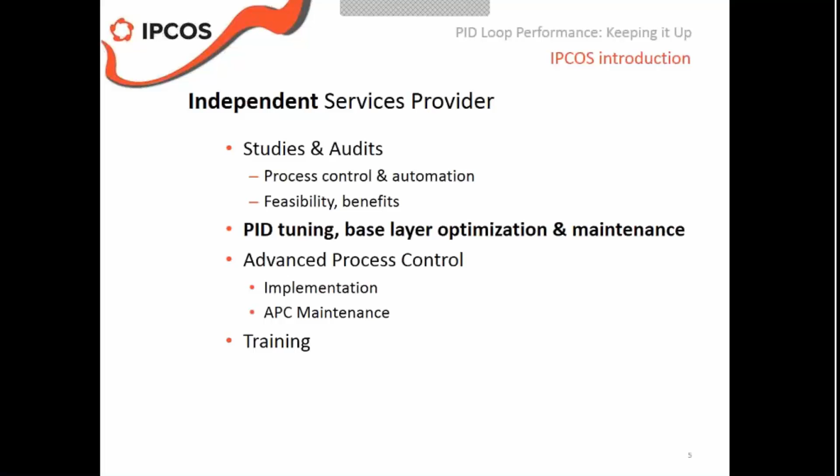All right, enough as an introduction to IPCOS. Let's get into the topic of the webinar now, PID loop performance, how to get it up to high levels, and how to keep it there.

Now let's start by recapturing why plants use PID control. Of course, the two main reasons are to provide basic stability to the process and to decouple the process. Let's take a minute to think about what this means.

Basic stability means doing automatic corrections in case of changes in the plant. This could be rejecting disturbances, like if it suddenly starts to rain, then you'll see variations in the overhead condenser of a column, and this would impact the temperature profile in the column. A PID loop could help correct that automatically.

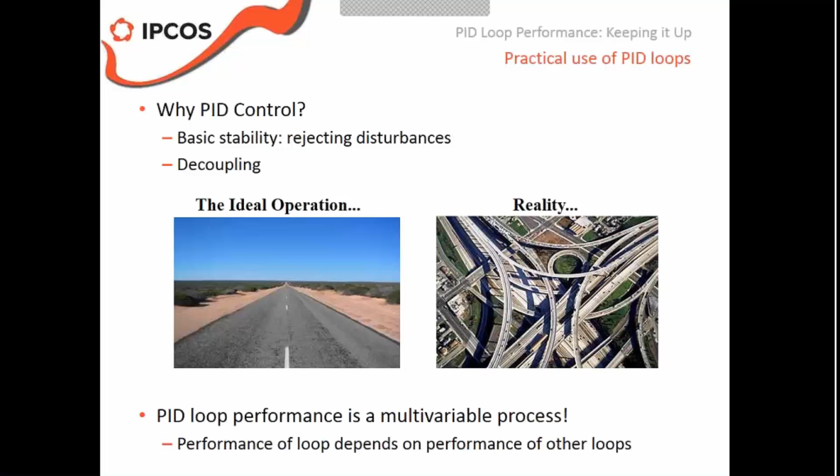The main reason for the reality being much more complex than that straight road ahead is that most of the process parameters are influencing each other. In control terms, we say that the process is multivariable. If you change one parameter, many other parameters will change as well.

And that's one of the main reasons why PID loop performance is something that isn't as straightforward as many people would think or expect. The performance of one particular PID loop will often depend on the performance of other loops around that PID loop.

Now, why is this important? In many cases, it might be impossible to tune one loop correctly if other loops around it have not been optimized. And this goes further than just the tuning in auto mode. A PID loop should remain stable even if the other loops around it are taken into manual.

And again, let's circle back to that example at the top of a column. The pressure and temperature at the top of a column - it could well be that if you tune both PID loops very tightly, they work well. But as soon as you take one of them into manual, the other starts to oscillate. And therefore, we consider PID tuning really a multivariable problem.

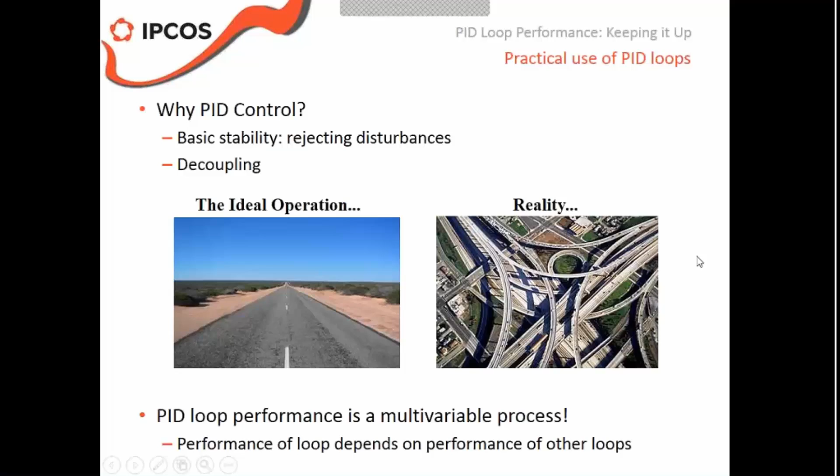Let's look at how we see that customers use PID loops in practice. We all know that some PID loops perform better than others, and if we walk into the control room of a plant, then we typically encounter one or more of the following scenarios about how PID loops are being used.

The first scenario is a scenario that we would all like to have. PID loops are in auto, performing well, that's how we like it.

Now the second scenario is a scenario that looks like the first one but is fundamentally different. The PID loops are in auto, they seem to be working well. However, whenever there's a disturbance in the plant, operators take the PID loop in manual, they change the output of the controller, and then put the loop back in auto again. And then when you ask them why they're doing it, they say, well, we're helping the PID loop. So our question would be, who's doing the basic control here? Pretty sure it's not the PID loop.

The tricky thing with this is that it's sometimes difficult to see that this is the case until you really sit next to the operators or take a very close look at the data. If you just take a look at the percentage that the loop is in auto, for instance, it will be close to 100% because the operators take the loop in manual just for a few seconds until they've adjusted the output. So there's basically little or no PID control, but you don't see it in the status of the loop. So this is not a good situation.

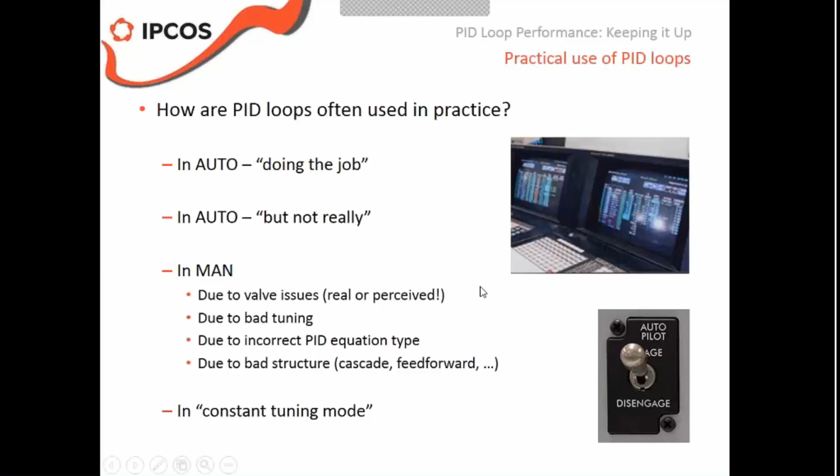So how do our customers go about this PID tuning activity? The main goal is, of course, to improve the overall performance of the base layer controls of the plant.

What we see is that many sites do PID tuning based on operator request. That's not a very structural approach. Quite often there's no real root cause analysis done. The control engineer only looks at the loop that the operator is complaining about without looking at the other loops around it. Remember what I said at the start, PID loop tuning is really a multivariable process, so you have to take into account what's happening around the process area that you're focusing on.

As a result, PID tuning could be improved for today and maybe for next week, but how robust will that tuning be for next month, next crude slate, etc.

What we also see is that PID loop tuning is seen as a sort of regular activity when time permits. Again, if you do it this way, then there's little structure to the work. Whenever time permits, the control engineer looks at several PID loops and performs some tuning here and there, and that's the way the PID loop performance is being improved and maintained.

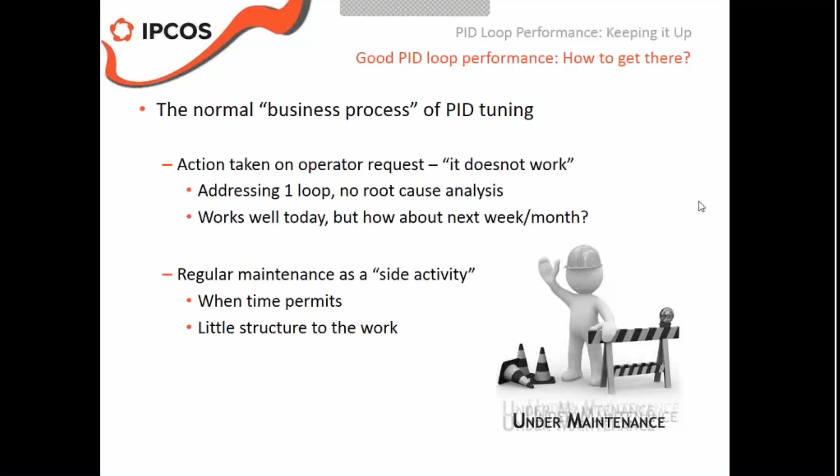Now, these approaches to PID performance improvement don't really bring a lot of structural value. They're spot solutions, really, that might help you today but won't continue to bring value in the long term. And that's a pity because you've spent all that money on a beautiful state-of-the-art DCS, and then you're not getting the maximum value from your DCS in terms of basic control performance.

So indeed, more and more organizations realize that there's more value to be had from the DCS in terms of basic control performance. What's required for that is a focused effort to really optimize the base layer controls. By focused effort, I mean either in-house or outsourced, but focused, time set aside to do this.

And by addressing not just the tuning of the loops, but also the structure of the base layer controls, cascades, equation types, etc., all in a multivariable sense, keeping in mind that the process you're trying to control is truly a multivariable process in which many things will change if you change just one process parameter. Therefore, you need to have good process understanding if you want to really optimize your base layer control.

We always tell our new hires in IPCOS who are going to do PID tuning that the structure of PID loops is not a free choice. You can't just pick and choose what cascade you build and what equations you use. In a way, you need to listen to the process. The process will tell you what structures to use. It all starts with understanding the process, and that's something we really keep emphasizing.

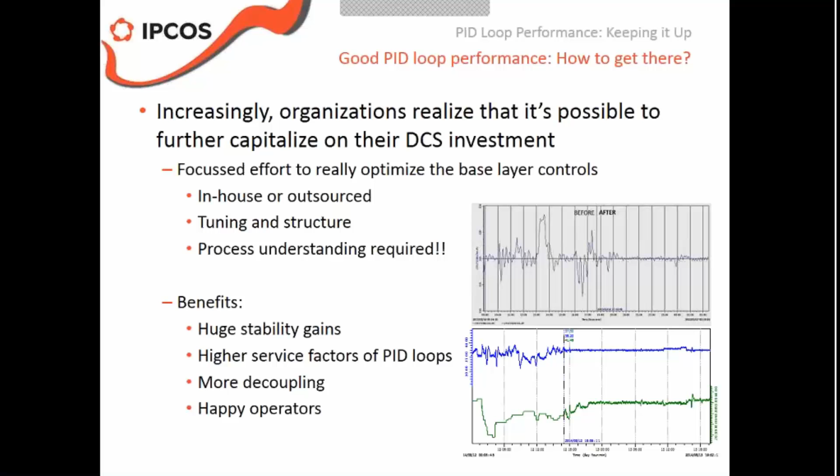We're talking process control. Now, if you do this structured effort to improve the base layer control performance, what do you get? Well, basically, it's back to the original reasons why you would use PID loops in the first place. Significant stability gains, which can give you higher throughput, better quality, less energy consumption, less alarms, less wear and tear, and less catalyst deactivation due to less excursions, etc. So it will give you good benefits in terms of stability, but it will also give you higher service factors of your PID loops, which will keep your management happy as well. And it will give you more decoupling in your process, which will keep your operators happy.

Now, the topic of this webinar is not to discuss the details of PID loop tuning, but I thought I'd still share these best practices with you. Just a quick rundown of some things to keep in mind when doing PID tuning.

First of all, always separate safety and control functions. If you have safety functions connected to a particular process variable, make sure that the safety functions and the PID control function are implemented separately, so that if you ever choose to change the PID control structure or the tuning, you don't interfere with your safety functions. Now, this might seem obvious, but we've seen customers confusing the two, let's call it that way.

Second thing to keep in mind is know the limits of PID control. PID control is really what we call a SISO strategy, single input, single output. And that means that you can control a single input with a single output only, and not a whole process with one simple loop. As a result, heavily interacting processes might not be controllable by just using PID controllers. A good example there is an exothermic reactor with inter-bed quench flows. Controlling the bed temperatures is often virtually impossible in a robust, stable way with PID controllers because of the highly interactive dynamics in the process.

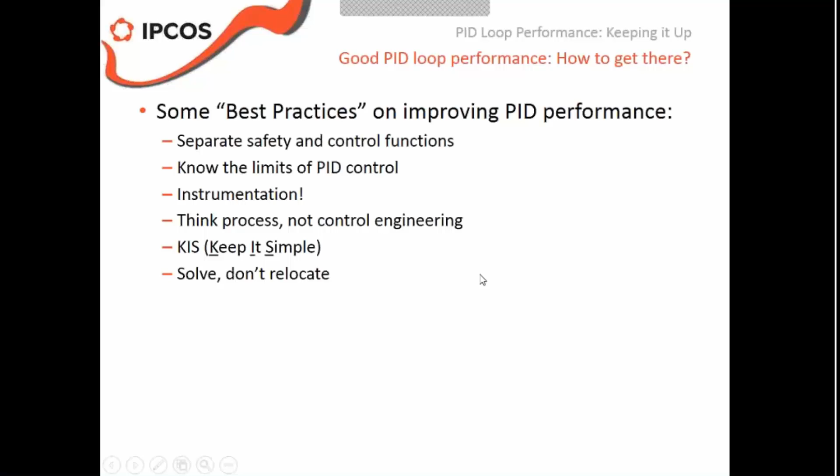All right, now let's assume you've done your improvement efforts either in-house or with the help of an outside vendor, and your base layer is in a very good shape.

The challenge then will be to keep the performance at that high level. You probably know that PID loop performance will degrade over time. A process is a living thing. You can have fouling and equipment deterioration. You can make small changes to your equipment. There could be operational mode changes. Your catalyst might deactivate over time, etc. And as a result, the performance of some of your PID loops and the benefits you're getting from the base layer controls will decrease over time. So what needs to be done to keep it at the highest level?

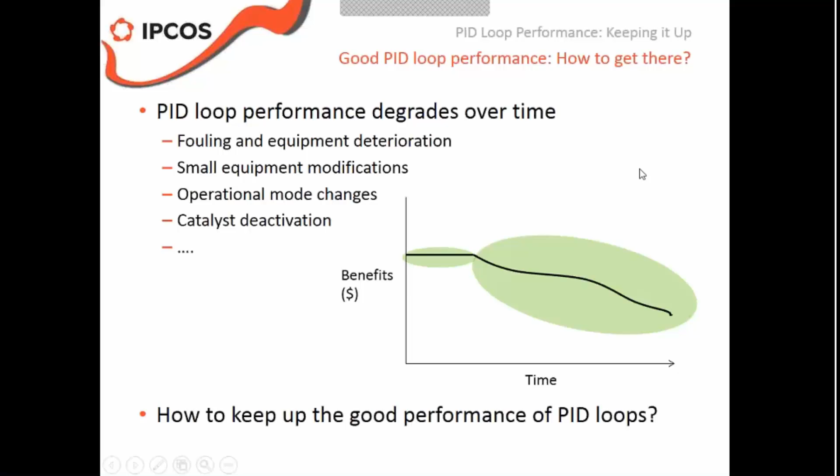The most heard question when we discuss PID loop performance maintenance is, I've got thousands of loops and I don't know where to start. And the funny thing is that this should not be a maintenance question. If you think your problem is that you've got too many loops to watch, then you haven't done the first step of optimizing your base layer controls. If you do a thorough initial optimization of the base layer, you will find that more than 95% of all your loops will stay well tuned forever. And because all of these loops are now performing robustly and optimally, it's much easier to pinpoint loops for which the performance is degrading. Let me give you an example.

In a chemical plant, we saw that approximately 40% of the loops were in manual. A lot of the loops that were in auto were in the apparently-auto mode, where operators were helping the loops whenever there was a disturbance. So these loops weren't really controlling well either. And the loops that were in manual were mostly manual due to either bad tuning or a bad choice of PID equation.

So in conclusion, the plant was pretty much in manual for a large part, and the control engineers at the site did not know where to look first. They had so many loops that could be improved. We helped them with a complete optimization of the base layer controls, and that resulted in more than 85% of the loops now being in auto, and I mean the true auto mode. The vast majority of the loops that we tuned will stay in auto forever because they are robust and the interaction with other loops is limited.

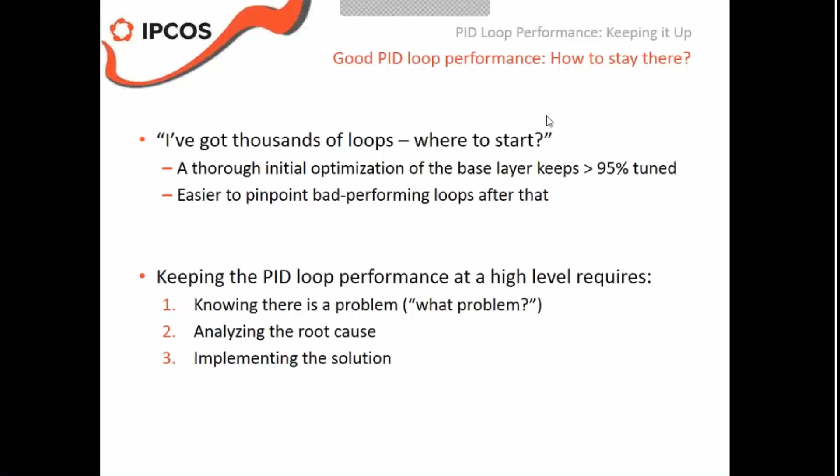How do you know there's a problem? Well, the first way of finding out is the reactive way, by hearing the operator complain. If that happens, then you know there's a problem. Now, the cost of this method of problem detection is of course very low. The operator tells you and that's it. However, the disadvantage of this method is that it relies on the operators to tell you there's a problem. If they don't shout, you don't know. And if the operators fall back into their 'I will help the PID loop' habit, then you're losing money.

The second way of detecting problems is by using PID performance monitoring tools, the so-called closed-loop performance monitoring systems. These systems collect data from PID loops, and they do online mathematical analysis of the data to come up with some KPIs for each loop. The big advantage of these systems is that they do the detection and reporting fully automatically, and also the evolution of the performance over time is visible to the user.

The disadvantages are that they generate a lot of false positives, certainly in the beginning, but also later in the maintenance phase, and that causes the control engineers to be overwhelmed by the performance alarms and not knowing where to start. Also, typically, the license cost of these systems is rather high.

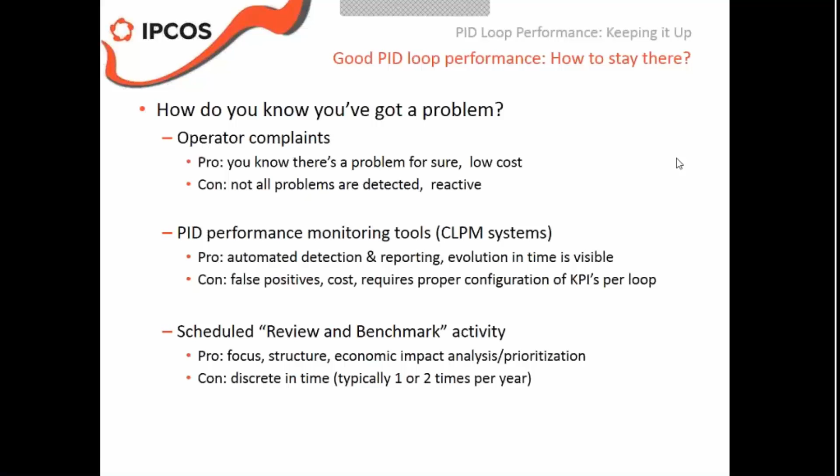Now let's assume you know there's a problem, you've identified the problem. Now the question is, what is the root cause? And I keep reiterating how important process understanding is. The root cause must be seen in the context of the process.

The biggest pitfall in maintaining PID loop performance is assuming that it's just a PID tuning exercise. And before you know it, you'll be trying to tune a loop that's not correctly configured anymore because the process or the operating point of the plant has changed, and therefore you must consider the process in determining what caused the decrease in performance of the PID loop and decide based on that what the correct action is.

Another pitfall that we see people fall into very often is the question whether the performance degradation is temporary or whether it's here to stay. Sometimes PID loop performance degrades because of a temporary situation that will last probably only a few hours or a few days, and it won't happen anytime soon in the future.

Our recommendation would be don't try to tune your loop to address that. Trying to fix a problem that only exists for a few days will cause worse performance in normal operations. And please don't build complex structures to address very special situations. Keep it simple. PID loop maintenance is best done on simple structures.

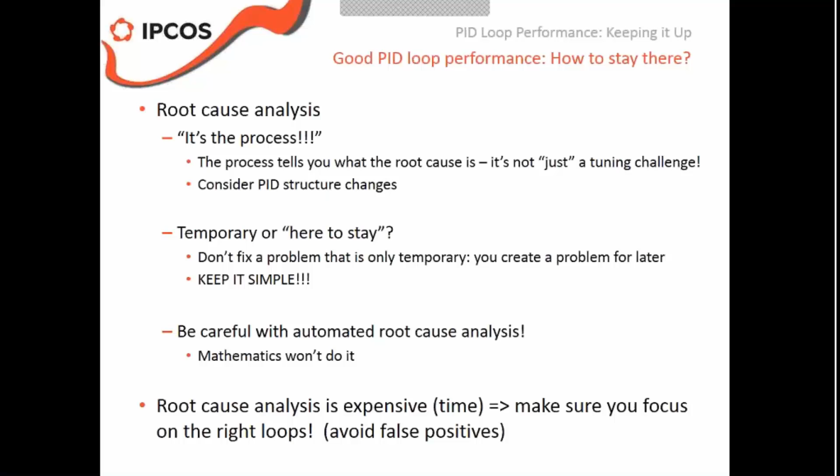Now, once you've found the root cause, obviously you can define what the solution to the problem is. And if tuning is the solution, then you need to make sure that you do the tuning in an efficient and a structured way. Don't use trial and error.

You'll probably never stop wondering whether it can be better. Make sure you use tools that allow you to do one-shot tuning, including for cascade loops. And make sure that the tool you use allows you to analyze robustness of the loop, including the influence of other loops around it.

Again, think of retuning the top temperature controller in a column. You need to make sure that your top temperature controller stays robust and stays stable if the pressure controller in the column is switched to manual.

If a new structure of the PID controls is the solution to your problem, make sure that structure is simple and logical, and that the operators get trained. This doesn't need to be a huge amount of training, but you need to explain why the structure was changed and how to use it. Also make sure the tuning of the new structure is done efficiently and robustly, including one-shot tuning for cascade loops.

Make sure that you document the changes that you make, and preferably use tools that document the changes for you.

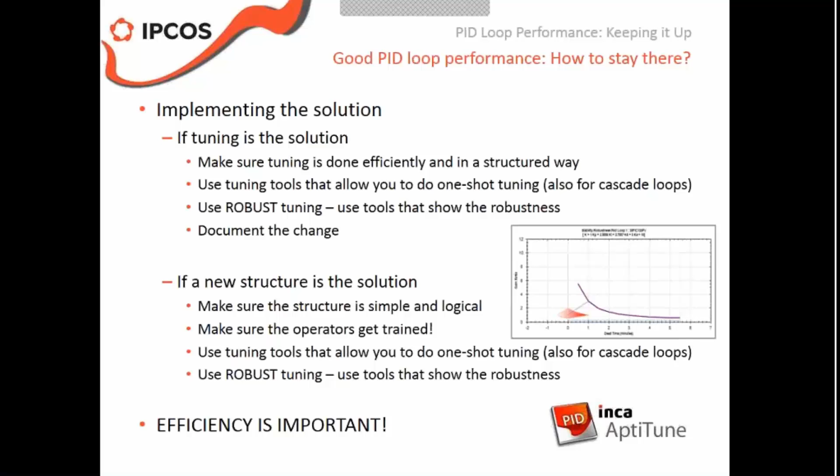All right, we're coming up to the end of the presentation. What I want to do is share a couple of business case examples. These examples are based on customers that we've worked with or talked to, to see how they tackled PID performance improvement and maintenance. Some did very well, and others did less good, as you'll see.

In this first example, a customer did a complete review and optimization of the base layer in one big project, which they completely outsourced. More than 1,000 loops were reviewed, tuned, and reconfigured as needed. The operators were trained, and control engineers were trained in using our INCA AptiTune loop tuning package, all as part of the project. The whole exercise gave them a significant increase in stability, leading to an increase in production and a reduction in the number of alarms, also very important.

We're now several years later. They're doing all the PID maintenance in-house. The number of loops that requires their attention is in fact very low, and that is because the tuning done in the original project was done very robustly, keeps working well at varying operating regions, and they don't have any difficulty determining which loops require attention, because it's very easy to spot those when looking at the key process parameters in the plant. That's because they took the approach to really look at the entire base layer optimization in the first place.

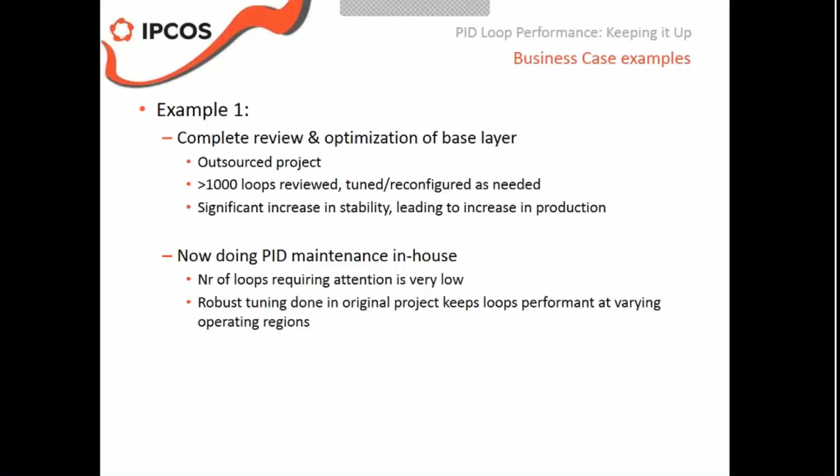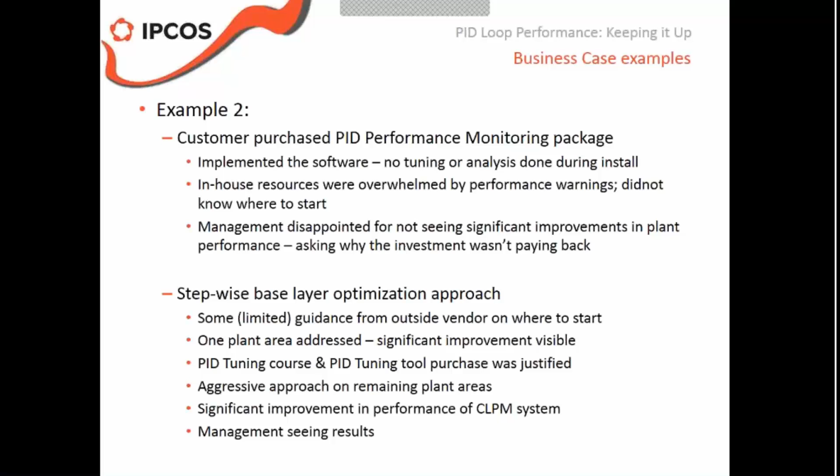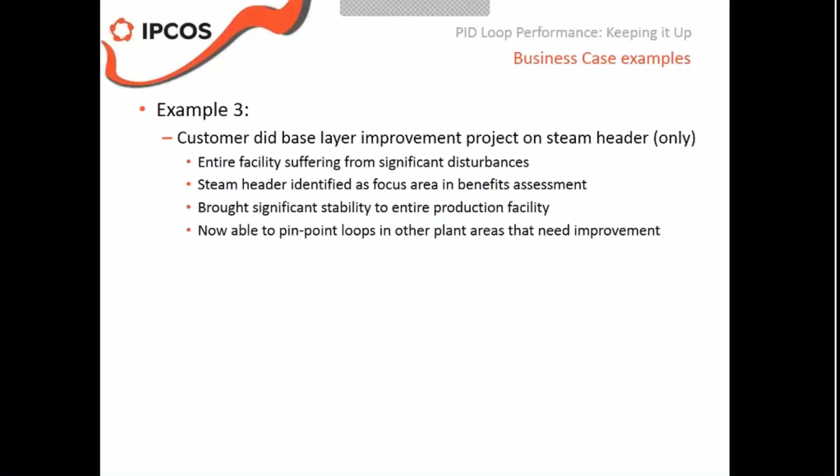And when we did the base layer control improvement project for the steam header, it gave a lot of stability to all the plant areas, and suddenly it became a lot more clear what loops in the other plant areas required attention. This has then led to further benefits and stability in the other plant areas with limited investments for PID loop improvement projects.

I see one question coming in here. So, you recommend against performance monitoring tools? Good question, that was to be expected.

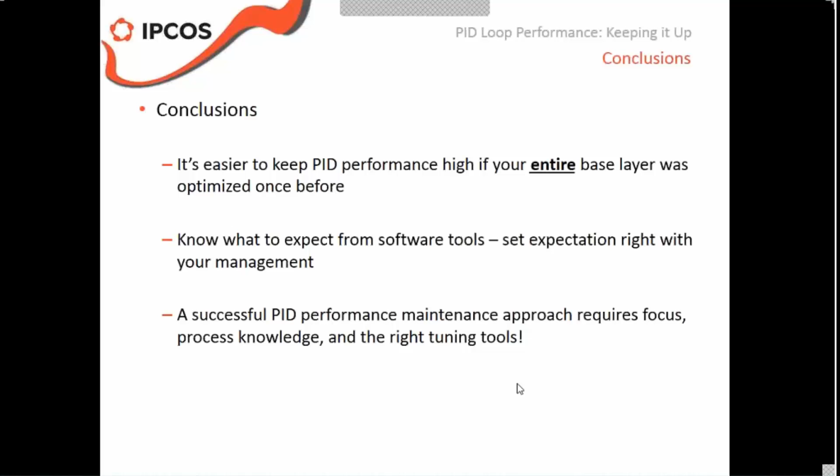All right, given the time, I am going to leave it at that. I see several other questions that are a bit similar to previous questions asked, and I'll address those via email.